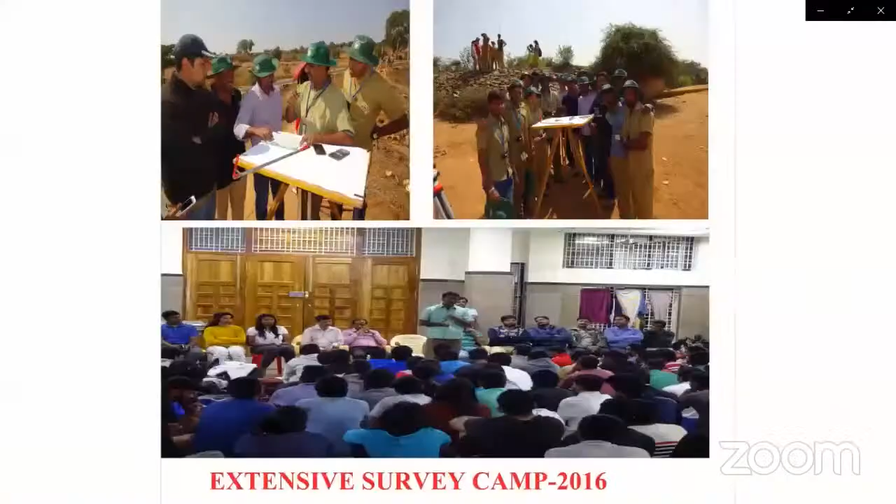Field trips and hands-on learning make concepts more memorable. Our branch, being more related to fieldwork, ensures students get exposure by organizing field visits to various places such as water treatment plants, construction sites, irrigation and dam sites, etc. Also, an extensive survey camp is part of the curriculum for 6th semester students.

Every year, the camp is conducted for a duration of 10 days at Melukote in Pandavapura Taluk of Mandya district, Karnataka. Around 4,000 engineers have graduated from the department since 1979. The alumni of the department are part of national and international projects, and many are leading entrepreneurs. To name a few, our alumni are rendering their service in Indian defense, Indian administration, politics, arts, sports, research, and academics.

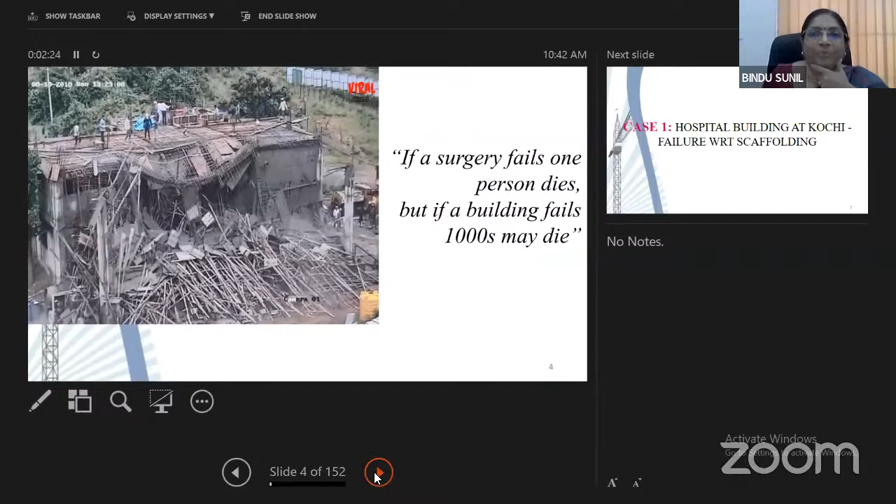I will share a small video showing this. I hope you are able to see the video. Yes, ma'am. Okay, so moving on to the case studies.

Here I am trying to, I have planned to present 5 case studies which I was involved in. Our company was involved in some way or the other. Some projects we were the primary structural consultants, and in some projects we were peer reviewer.

So this is a hospital building, with respect to a scaffolding failure. Here we were the primary structural consultants, and a supervisory role was not given to us. We issued the drawings, and before designing the structure, we had visited the site and understood the topography, and we designed the structure and gave it.

It is a hospital building with 3 basements and 6 floors. The floor heights are as follows: basement 3, the lowest basement, is 4.2 meters, basement 2 is 3.9 meters, basement 1 is 4.2 meters, and ground and the 5 upper floors are all 4.2 meters.

The problem happened when a porch slab, a front porch slab, spanning an area of 10 meters by 50 meters, collapsed while concreting was being done.

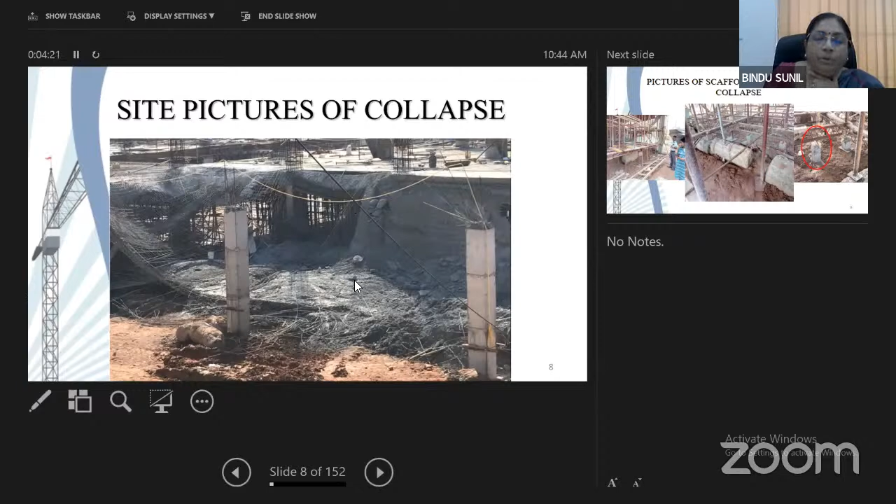So this is the area, this picture shows the area where the collapse happened. This highlighted area is the portion where the collapse happened. This is a side picture of the collapse after it happened. Half the portion of the slab collapsed while concreting was going on.

Later when we visited the site, we could see that the scaffolding system provided, the supporting systems provided, were not at all up to mark, to the point that it is a miracle that only half the portion of the porch slab collapsed.

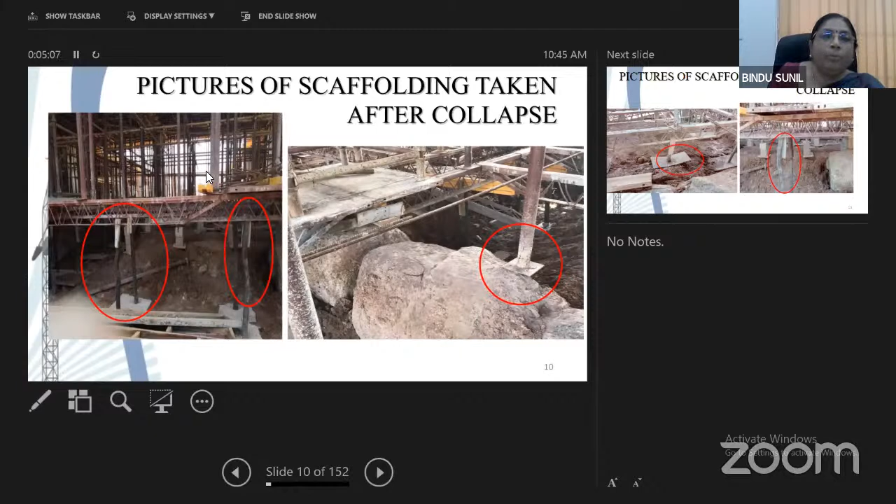So if you can see, this is how the supports were, the props were supported. These are all broken bits of piles, and the supports are not through and through. It is haphazardly supported on a bent wooden piece, and then the acro span is provided. Above that, another vertical member is provided. The proper diagonal or horizontal bracings are not there.

So these are pictures highlighting how the collapse happened. So why did it collapse?

The vertical props and acrospans of the scaffolding system were of poor quality and in bad shape. Supporting jacks were extended to their maximum length, leading to a large slenderness ratio, and there were no proper horizontal or diagonal bracing for lateral stability of the system.

Broken concrete cubes were used for supporting the props. The base of these props were not properly supported. The geometry of the scaffolds or staging was not correct for a smooth load path to transfer the heavy concrete load to the ground. The scaffold supports are placed on ground without proper ground compaction or any larger base to distribute the load without settlement.

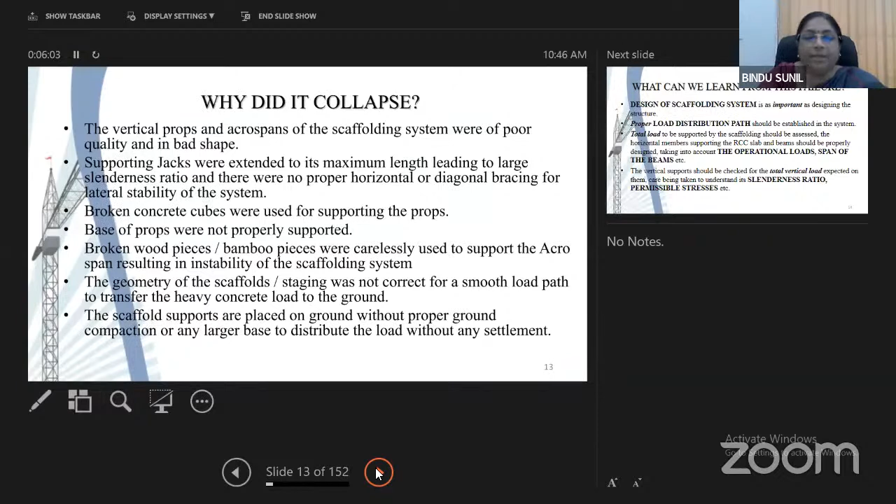So what can we learn from this failure? We have to understand that the scaffolding system is also a structural system supporting loads, and design of the scaffolding system is as important as designing the structure itself.

Like we do for the superstructure, a proper load distribution path has to be maintained and established in the system. The total load to be carried by the scaffolding system should be assessed, and the members supporting it, the horizontal as well as the vertical members, should be properly designed, taking into account the operational loads, the span of the beams, etc.

It has to be borne in mind that the weight of wet concrete has to be taken into account, the live load due to men and machinery, and the pumping impact load on the shuttering due to the pumping of concrete, etc., are to be taken into account.

The vertical support should be checked for the total vertical load expected, with care taken to understand its slenderness ratio, permissible stresses, etc. The height of the staging or scaffolding should be checked, and proper bracings should be provided to prevent buckling and ensuing failure.

Most importantly, the foundation or base support should be properly seated, anchored, or held firmly in position at the base using suitable methods, so that sinking of supports, dislocation of supports, swaying, etc. are prevented.

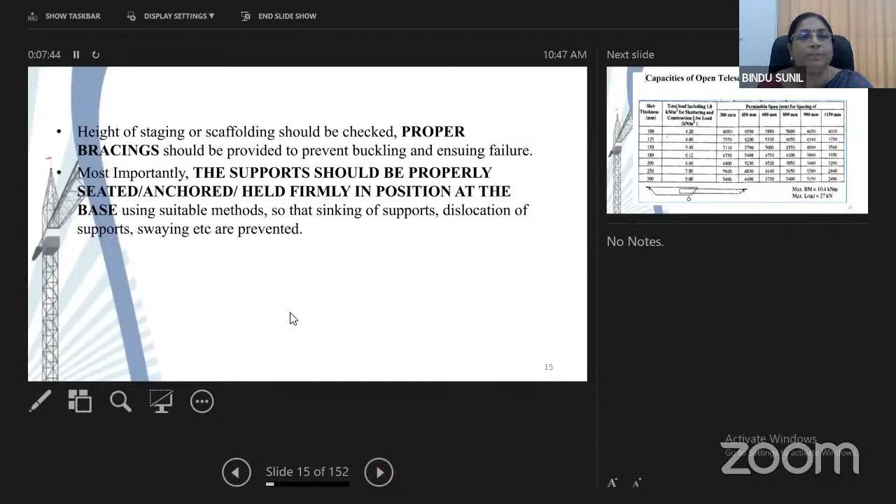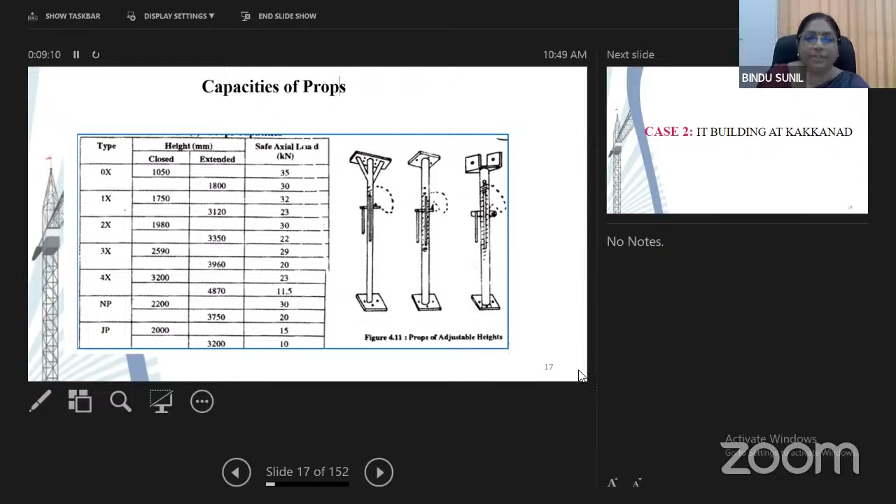So whoever is the contractor will have to prepare a staging detail, and it will have to be vetted by a structural consultant, and the adequacy of the sections provided should be checked. So this was with regard to failure of a scaffolding system.

The second case is with regard to an IT building at Kakkanad, where the concrete strength attained for columns was less than what was required. In this project, we were associated as peer reviewers. So these are the details of the project.

This is an IT building, about 5 lakh square feet area. It has basement plus ground plus 19 floors, and the floor heights are written here. 3.4 is the ground floor height, then 3.15, etc.

So the problem is that in the basement, ground floor and first floor combined, some 19 columns altogether had concrete strengths reduced by 30 to 45% than the required M45.

The building has a basement plus 20 floors. Columns are spaced at approximately 10 meter by 10 meter grids. The concrete mix specified for columns in basement, ground floor, and first floor was M45. Cube strength results for 19 columns in ground floor and first floor showed strengths way below the required M45.

Since the cube strengths were less than what was required, additional tests were done to confirm the in-situ strength of the concrete. For that, rebound hammer test and core test were conducted.

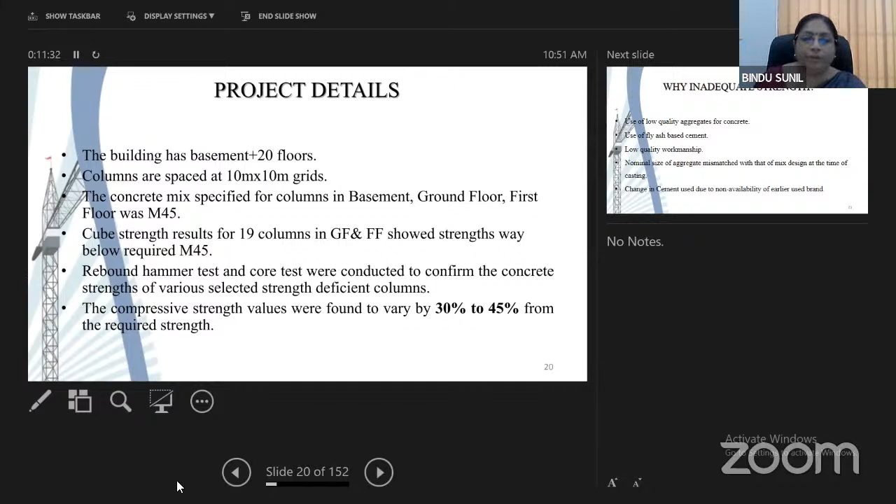So why did this reduction in strength happen? There are many reasons for concrete attaining lower strength than expected with respect to the mix design. One is use of low quality aggregates for concrete. We have a certain specific size and shape for the coarse aggregates for concrete. So if long and flaky aggregates are used, it will break and the strength of the concrete will be reduced.

Then use of fly ash based cement. Fly ash based cement can of course be used, but it has to be judiciously done. So here there was some problem with the fly ash content, and that also contributed towards the low strength. Then low quality workmanship, which comes in the compaction of concrete, curing of concrete, etc. If all these things are not done properly, obviously the concrete strength attainment will be reduced.

The nominal size of aggregate used at site mismatched with that used in the mix design at the time of casting. That means the mix design is done with available materials and a trial batch is prepared and the concrete strength is ascertained. But later on, when different types of aggregates or components come, trial mixes for all these variations in the components are not done, and it may vary from the actual mix design and the site mix produced.

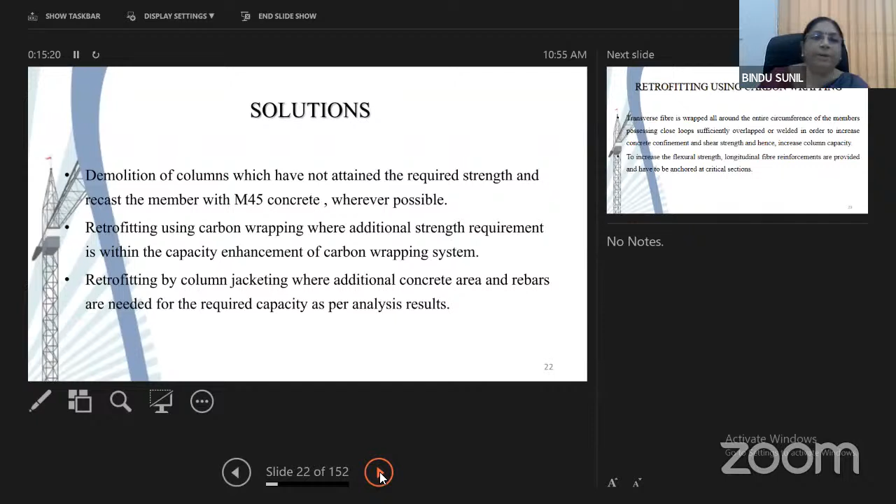For some columns, the upper floor shuttering was already completed, so demolition would be more difficult, because steel reinforcement cages were also placed for the next floor beams. So we proposed carbon wrapping for such columns where the reduction in strength was less than 25%. For columns with reduction in strength more than 25%, up to 45%, such columns were asked to be retrofitted by column jacketing, where additional concrete area and rebars are needed for the required capacity as per the analysis results.

Retrofitting using carbon wrapping means carbon fiber reinforced polymers, which are readily available, and like rebar, they have strength specifications, so as per our strength requirement we can use them. They can be tightly wrapped around the column, and the increase in strength is caused due to confinement. If a beam is of low strength and we use carbon wrapping, then to increase flexural strength, longitudinal fiber reinforcements can also be provided. But here it was with respect to a column, and these carbon fibers were asked to be sufficiently overlapped to increase the confinement and increase the column load carrying capacity.

So these are some pictures showing how carbon wrapping is done. By column jacketing, this is just a sample detailing. The existing column will be this. We will have to increase the width and length of the column, and a minimum of 75 mm will have to be provided; more will be needed if additional strength required is more. So here we propose a 75 mm increment on all four sides, meaning 15 centimeters altogether added to the width and length of the column, and additional rebars were provided.

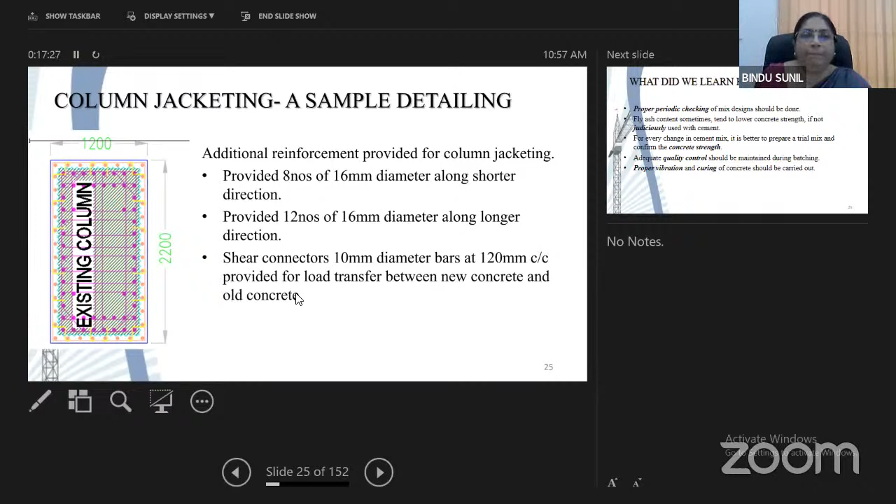So this was how it was done. What we learned from this failure is that proper periodic checking of mix design should be done. Once a mix design is done for M45, say, it cannot be used for the whole building.

For each stage, the cement brand or where the cement is acquired also has an impact on the strength. So all the components like cement, sand, coarse aggregate, and the workability agents all play a part in imparting the concrete strength.

When changes happen in the components, the concrete mix design has to be done again. A trial mix has to be prepared to ensure the concrete strength, and then that mix has to be used. Fly ash content sometimes tends to lower concrete strength if not judiciously used with cement, so that also has to be taken into account while preparing the mix design. For every change in cement mix, it is better to prepare a trial mix and confirm the concrete strength.

Adequate quality control should be maintained during batching. Proper vibration and curing of concrete should be carried out. Everyone knows these basic things, but they may not be judiciously and correctly applied at site. That is the problem. If all these things are done correctly at site, such failures or mistakes will not happen.

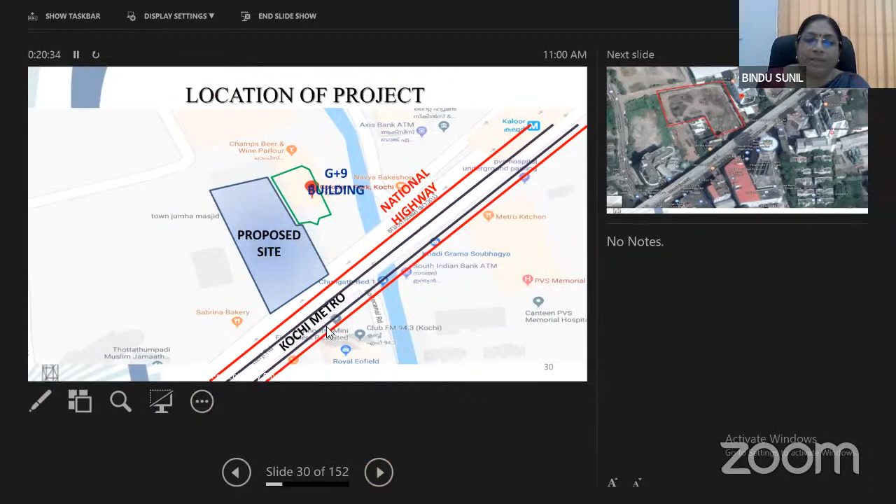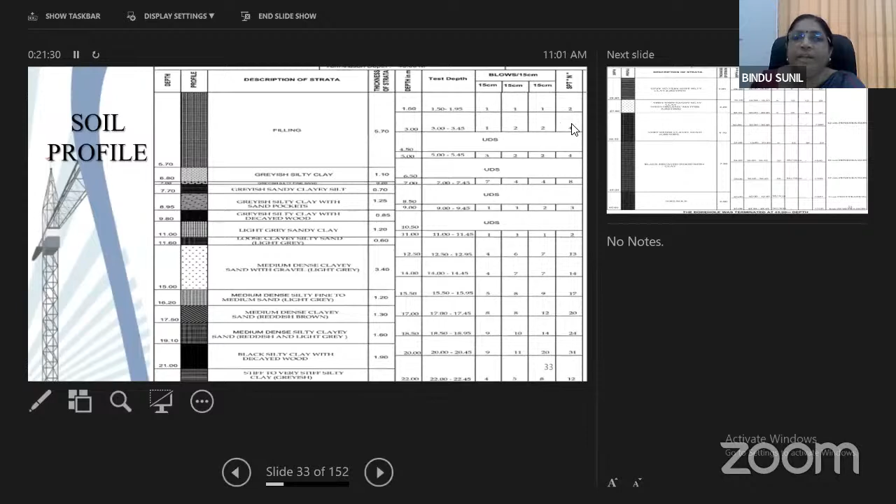So the soil profile, as can be seen, up to 5.7 meters, it is filling, with N values as low as 2, 4, 3, etc. Up to about 12 meters, the soil is very weak and compressible with N values as low as 2, 3, etc.

In this borehole, soft rock was met with at 45 meters depth. This borehole was terminated at 45 meter depth, but we have 5 boreholes and some were taken beyond this soft rock also. So the foundation system provided was DMC piles extending to a depth of 47 meters, terminating in dense sand or hard rock. Wherever this hard rock was further down, it was seated into dense sand with N value greater than 100, with a minimum penetration of 2 meters into the dense sand using M35 concrete.

For the shore piles, the depth of excavation is 10 meters. So 30 meter deep, 90 centimeter diameter shore piles were provided. There were soldier piles provided inside the floor to support a strutting system provided to act as props for the shore piles.

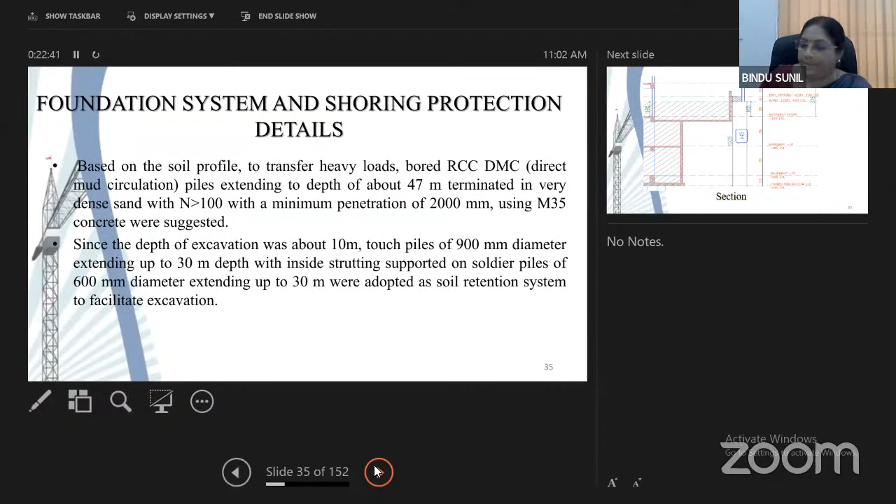So this is a section showing the excavation needed. This is the road level. From here, 9.5 meters is the excavation needed. This is a basic shore pile retention system provided. This is the boundary, the shore piles. We can see the shore piles here all along the periphery of the floor. Then this is the prop system, the strutting system provided.

This is the system provided. The shore piles provided are 90 centimeter diameter piles with a 30 meter depth, and the soldier piles are 60 centimeter diameter piles with a 30 meter depth.

In the construction phase, around 337 piles of 90 centimeter diameter were driven as touch piles, and 28 soldier piles were driven.

The touch pile system was designed as a propped cantilever to resist the lateral loads, as explained by the original structural consultant. Touch piles were done at the boundary by excavating a trench of 90 centimeter width and 1.5 meter depth in line and level. Alternate piles were done initially and then the in-between piles were done. So this was how the touch piles were done.

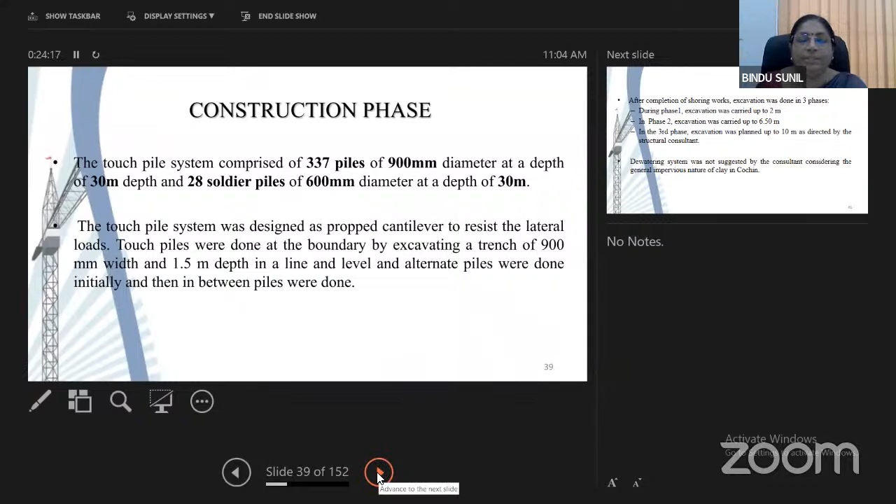After completion of shoring works, excavation was done in 3 phases. In phase 1, excavation was carried out up to 2 meters. Then from 2 meter to 6.5 meter. In the last phase, excavation was planned up to 10 meters as directed by the structural consultant.

Expecting clayey soil here, no dewatering system was suggested by the consultant.

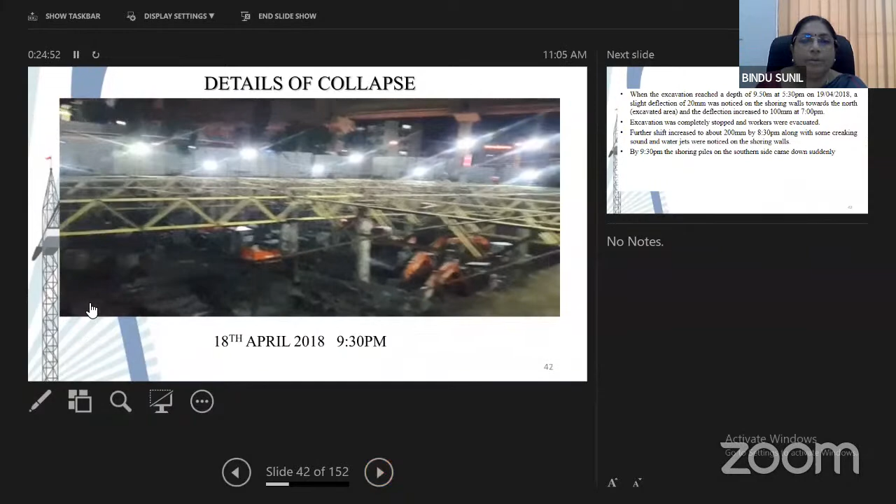This is what happened when the excavation reached a depth of 9.5 meters. A slight deflection of 20 mm was noticed, and it increased to 100 mm at 7 p.m. Excavation was stopped and workers were evacuated, but on the other side, where the excavation hadn't reached that much depth, some workers were still there.

By 9:30 p.m., the shoring piles on the southern side came down suddenly. That is what we saw just now in the video. This video was taken by some people in the opposite side hotel, who were interested in viewing that, and this video was taken by them.

So this is the picture after the failure happened. This is the line along which the piles were provided, where the Kochi Metro Rail is there. This is the adjacent building. You can see that the soil has sunken here and part of the foundation is being exposed. The ground has cracks here.

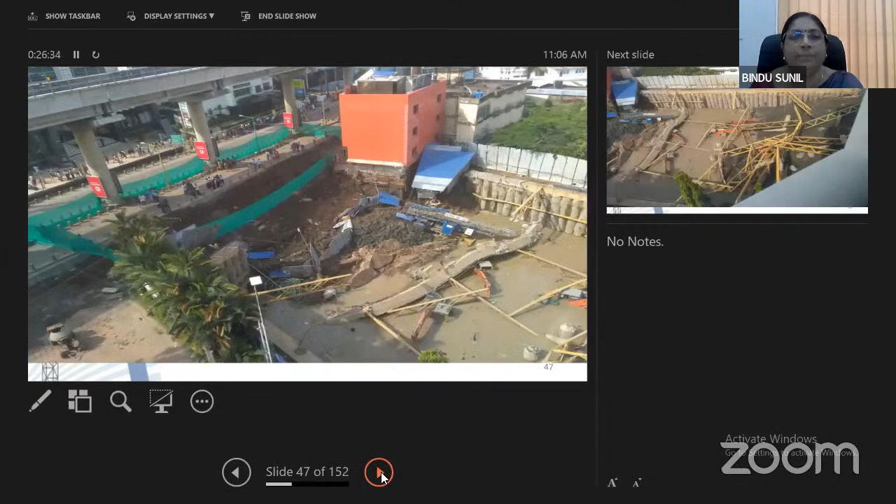On visiting the site, these observations were made. Due to the collapse of the touch pile system, the nearby road and earth had sunken by approximately 3 meters on the south side of the excavated area. Due to lateral shifting of the piles, the nearby earth was sunken on the southward side of the excavated area. The building near the southwest corner had a slight tilt towards the east side, cracks were noted in the building, and part of the foundation was exposed. This is indicative of progressive failure and may lead to sudden collapse of the building.

But that building, luckily, was meant to be demolished, with new construction planned there, so there was no problem with that. But if it had collapsed and fallen over, some casualties may have happened. Luckily, nothing like that happened.

Cracks were noted at ground level on all the other 3 sides of the excavated area. The roads paved with interlocking tiles had differential settlements, and the tiles were dislocated. Public utilities such as road traffic, electricity, and water supply were adversely affected by the collapse. It also resulted in a temporary halt of the Kochi Metro operations, since the structure was located near a metro station.

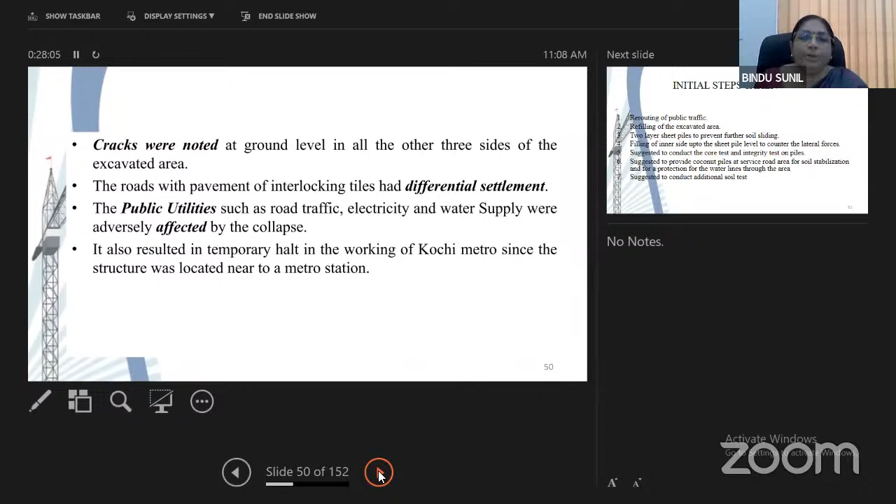Since such a big failure happened very near to the main road, the district collector intervened, and a technical committee was formed to address the issue, to understand why it happened, and to provide remedial measures.

Initial steps taken by the committee were to reroute public traffic, then the excavated area was asked to be refilled to reduce the retention height. Sheet piles were asked to be provided in 2 layers to prevent further soil sliding. Inside of the sheet pile, filling was to be done again to counter the lateral forces. Then core tests and integrity tests were asked to be done on the piles for forensic study.

Coconut piles were asked to be driven to stabilize the service road area for soil stabilization and for protection of water lines, since Kerala Water Authority's lines were running along that area. An additional soil test was asked to be done to understand the soil parameters and to check the design of the touch pile system.

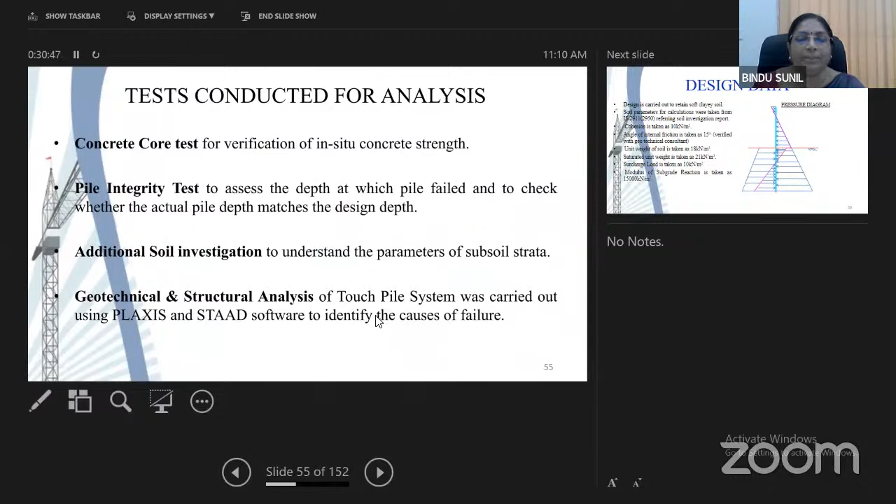So this is showing how it is done. This is the pressure diagram that comes on a shore pile when it is excavated. After this will be the ground level. When this much soil is excavated, this will be the active soil pressure, and this will be the passive soil pressure. So these are the different parameters we had taken.

Design is carried out to retain soft clayey soil. Soil parameters for calculations were taken from IS 2911, referring the soil investigation report. The cohesion coefficient is taken as 10 kilonewton per meter square, and angle of internal friction of the soil was taken as 15 degrees. And we cross-checked with the geotechnical consultant. With his approval, this value was taken.

Unit weight of soil is taken as 18 kilonewton per meter cube, and the saturated unit weight is taken as 21 kilonewton per meter cube. Surcharge load of vehicular traffic is taken as 10 kilonewton per meter square, and the modulus of subgrade reaction is taken as 15,000 kilonewton per meter cube.

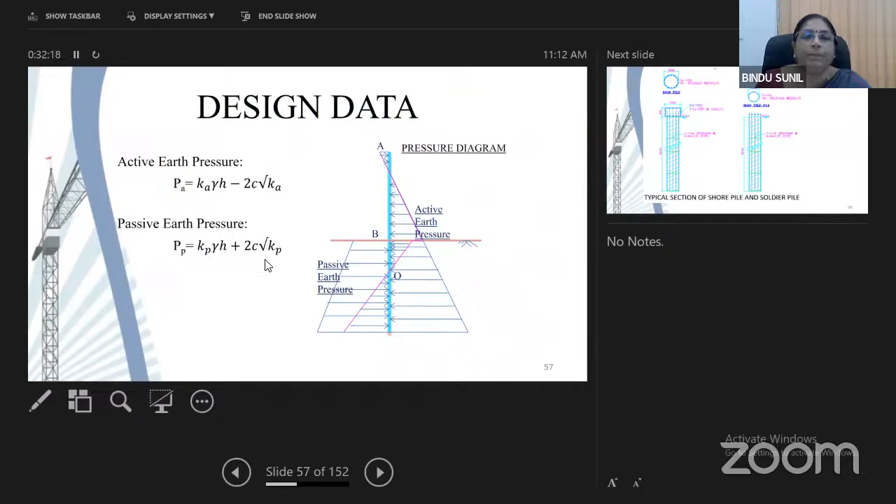And this is the active earth pressure equation. PA is equal to Ka gamma H minus 2C root of Ka, where Ka is 1 minus sin phi by 1 plus sin phi. And passive earth pressure PP is Kp gamma H plus 2C root of Kp, where Kp is 1 plus sin phi by 1 minus sin phi.

So these are the cross sections of a shore pile and soldier pile. Shore pile is 90 dia, and the reinforcement provided is 14 numbers 20 dia bars. For soldier pile, the diameter provided is 60 centimeters, and the reinforcement provided is 7 numbers 16 dia bars.

With the diameter and the reinforcement known and the concrete mix used, we can understand what was the moment of resistance, what is the moment carrying capacity of the shore pile provided. So for 90 dia pile, mix M35 and 14 numbers 20 dia bars, the moment of resistance worked out to be in the range of 800 to 815 kilonewton meter.

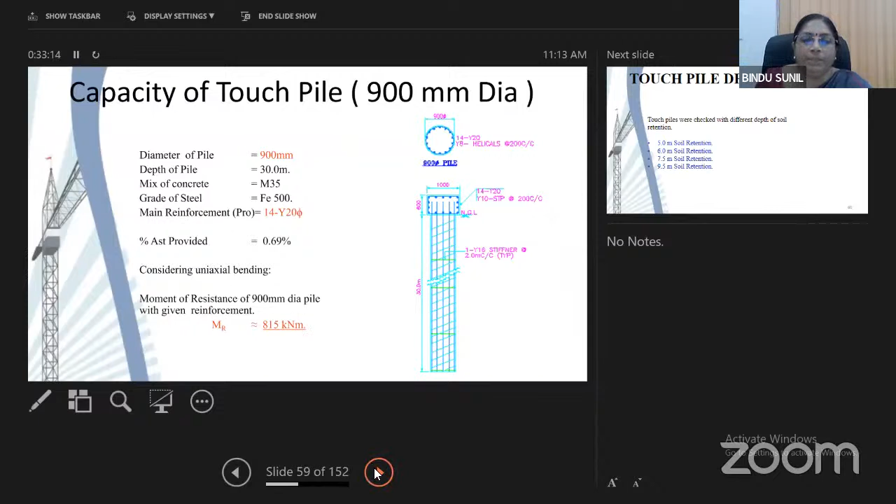Now our endeavor was to understand to what depth of excavation these touch piles will be safe. Only in the front side the touch piles had totally collapsed. Other three sides the touch piles were still standing, and we had now stabilized that area by refilling. So up to what depth the touch piles will be safe without any other propping or strutting system, we tried to find out.

So we modeled and found out for 5 meter depth of soil retention, 6 meter depth of retention, 7.5 meter depth of soil retention, 9.5 meter final depth of soil retention.

So this is the pressure diagram prepared for 5 meter soil retention. For the 5 meter depth of soil retention, point of rotation, that is, the distance at which the pile might rotate - that can be found from equations, and that was found to be about 0.9 meters.

These are the different parameters we have taken, and this is the output from STAAD model. For 5 meter cantilevered pile, for the retention load of 5 meter, the maximum deflection noted was 43 mm, that is 4.4 centimeters, and the maximum moment that was coming is around 350 kilonewton meter.

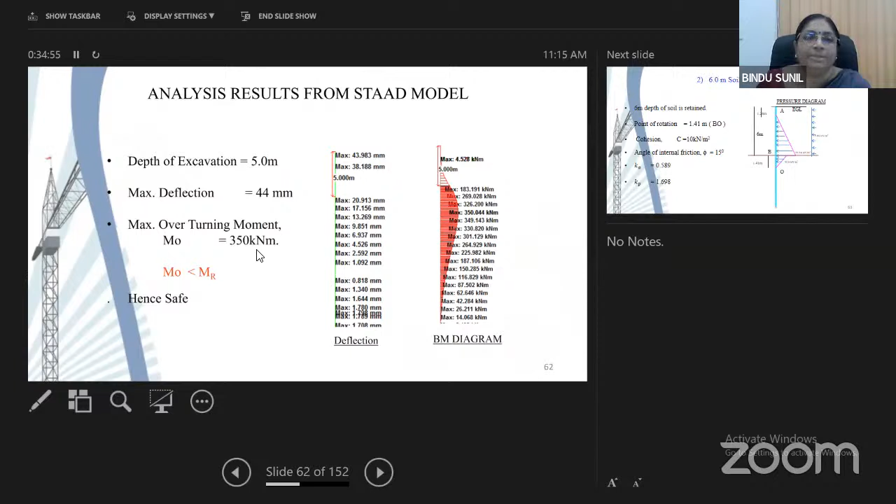The moment of resistance we had assessed was in the range of 815. So this is less than the moment resisting capacity of the pile, and so it will be safe for 5 meter retention. Then for 6 meter retention, the same procedure was done.

And here the moment increased up to 633 kilonewton meter, and the deflection increased to 90 millimeters. The deflection is slightly higher. However, since this is the temporary structure, this can be taken as okay. And the moment also was within the moment resisting capacity of the pile, taking a factor of safety of 1.3.

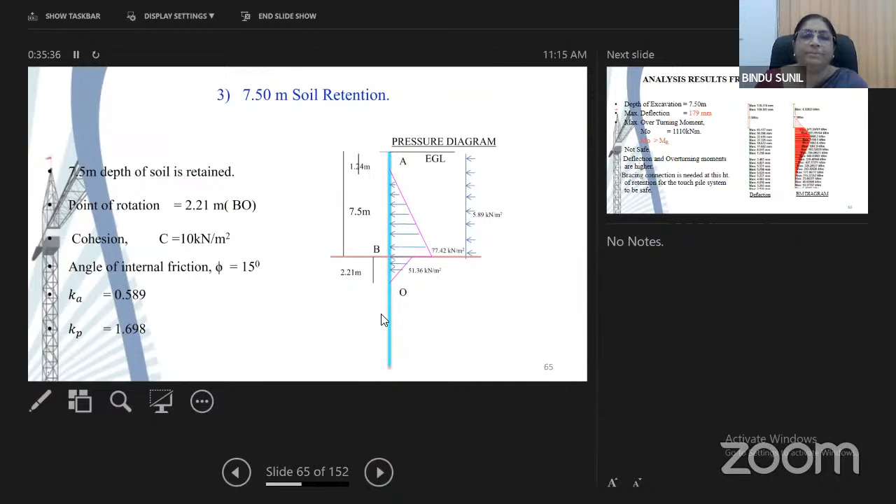For 7.5 meter soil retention, again the point of rotation and the pressure diagrams were calculated. When we did the analysis in STAAD model, it was found that the deflection increased to 179 mm, and the maximum moment was seen to be 1110. This is obviously unsafe, because even without factor of safety, the capacity of this pile is 800 or 815 kilonewton meter.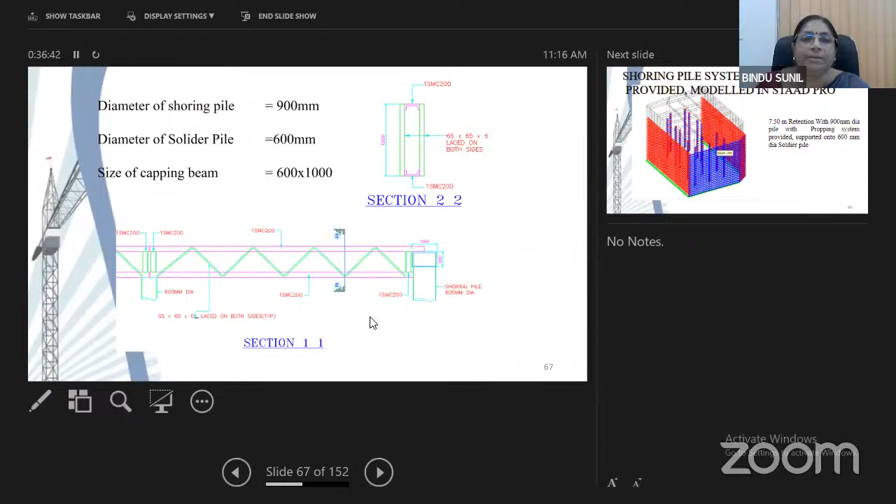So we modeled this. We modeled the entire touch pile system with the bracings in the three-dimensional model we created, and the loads were given accordingly. The supports were provided at the bottom with lateral confinement.

So this is the analysis results of the strut system provided, where utility ratio of truss element was checked. That means the actual stress in the element divided by the permissible stress should be less than 1, but we were getting values as high as 3.5, 3.7, etc.

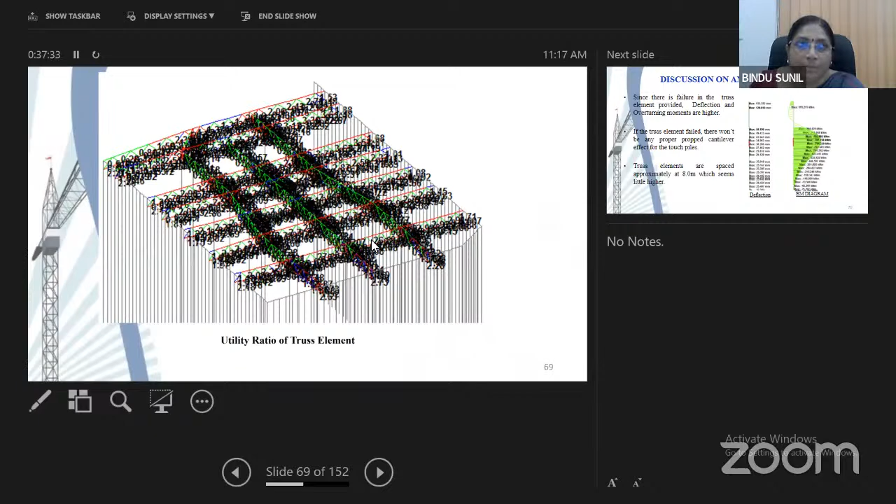So this system was totally not safe to take up the loads, the huge lateral loads that were expected to come over there.

So if we discuss the analysis results, it can be seen that there is failure in the truss elements provided. Deflection and overturning moments are higher. Here the deflection is 132 mm and the moments are coming at 800 kilonewton meter. So if the truss element failed, then we cannot say that there is a propping action for the piles. There will be no propping action and the deflection will be still higher.

When we check the reinforcement required from the model for the touch pile system, the reinforcement required was 60 centimeters square, whereas the AST provided was only 44 centimeters square. For the soldier piles, the reinforcement required was in the range of 40 centimeters square, whereas the provided reinforcement was only 14 centimeters square. So the reinforcement provided for both the touch pile and soldier piles is less than what is required.

However, if the propping system is more sturdy and safe and more number of propping systems are provided, the buckling of these piles will be less and the reinforcement required can be brought down. So what we suggested was that with a proper propping system, for 7.5 meter excavation, the driven touch piles can be made safe.

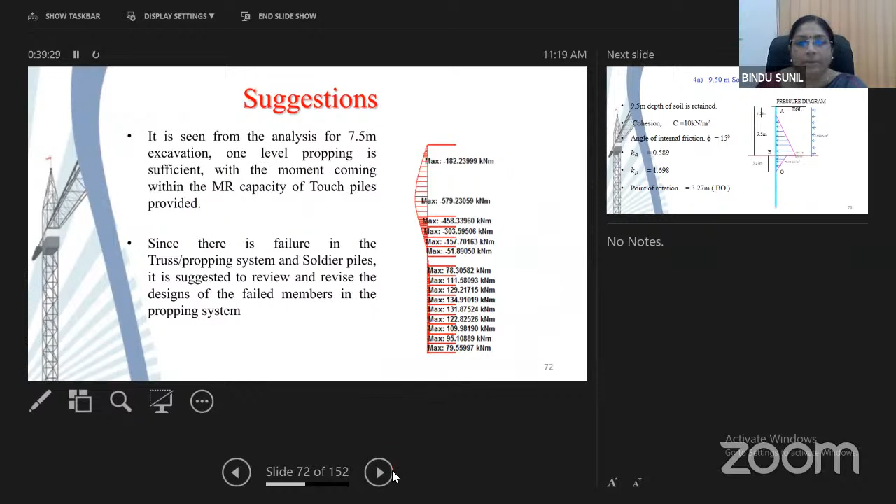For 9.5 meter soil retention also, we did the same exercise. The point of rotation was found. Here it was found to be about 3.2 meters below the excavated level.

And when analyzed as a single member in the model, we can see that the deflection comes to around 400 mm and the maximum bending moment comes to about 2090 kilonewton meter. So obviously this is not safe.

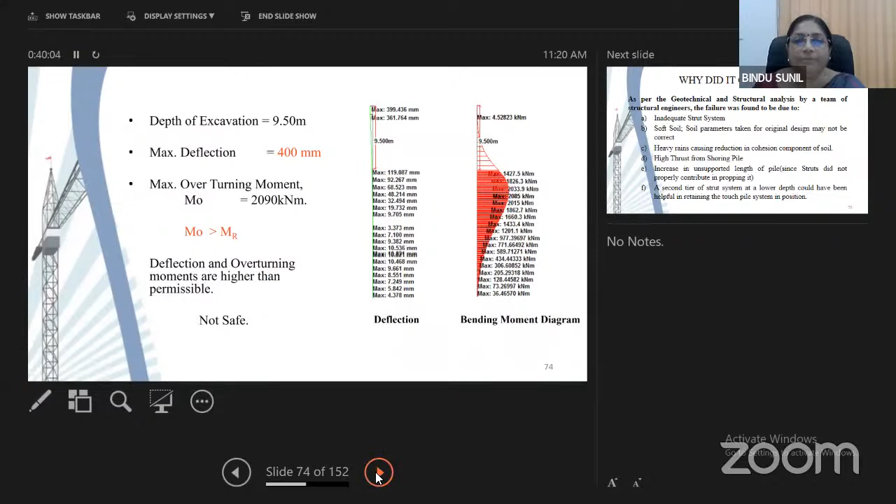So if we look at the reason why the collapse happened, like I said, there was a technical committee formed, and the Association of Structural and Geotechnical Consultants in Kochi were part of this technical committee, and we all deliberated over it, and these were the reasons.

Inadequate strut system. Obviously, if the strut system was proper, the propping action expected on the touch pile would have acted and it would have been safe. This was the most important neglect that happened in the design of the strut system.

Then, the topsoil is too soft. Soil parameters taken for the original design may not have been correct, was what we felt. Also, in the previous days before the collapse happened, heavy rains were there, and that might have caused reduction in the cohesion component of soil, thereby increasing the lateral thrust on the shore piles.

Since the props did not act properly, there was increase in the unsupported length of pile, and of course, this means that cantilever action ensued and the collapse happened.

If this 9.5 meter total excavation was needed, we felt that if a second tier of strut system was provided at a lower depth, the same diameter and reinforcement for the touch piles would have been safe.

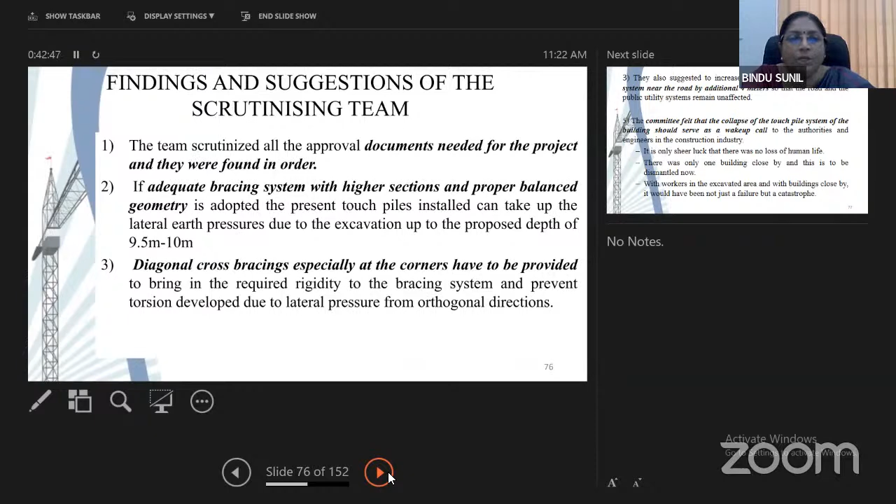If an adequate bracing system with higher sections and proper balanced geometry was adopted, the present touch piles installed could take up the lateral earth pressures due to excavation up to the proposed depth of 9.5 to 10 meters. Since it is a three-dimensional area with corners, diagonal cross bracings should have been provided to bring the required rigidity to the bracing system and prevent torsion developing due to lateral pressure from orthogonal directions.

They also suggested increasing the setback of the touch pile system near the road by an additional 4 meters. Near the road, the collapse had already happened, so driving touch piles again there is not practical. So the basement was asked to be reduced in extent by 4 meters from the road.

The committee felt that the collapse of the touch pile system should serve as a wake-up call to authorities and engineers in the construction industry. It was only by sheer luck that there was no loss of human life. There was only one building close by, and this was to be dismantled, so even if some cracks developed in that building, it was of no consequence. With workers in the excavated area and buildings close by, it could have been not just a failure, but a catastrophe.

What did we learn from this failure? We learned the importance of proper site investigation. This means understanding what type of soil investigation and lab results are needed, understood in the initial stage itself, and the geotechnical consultant should be briefed and whatever data needed should be obtained from him. The importance of proper site investigations cannot be emphasized enough.

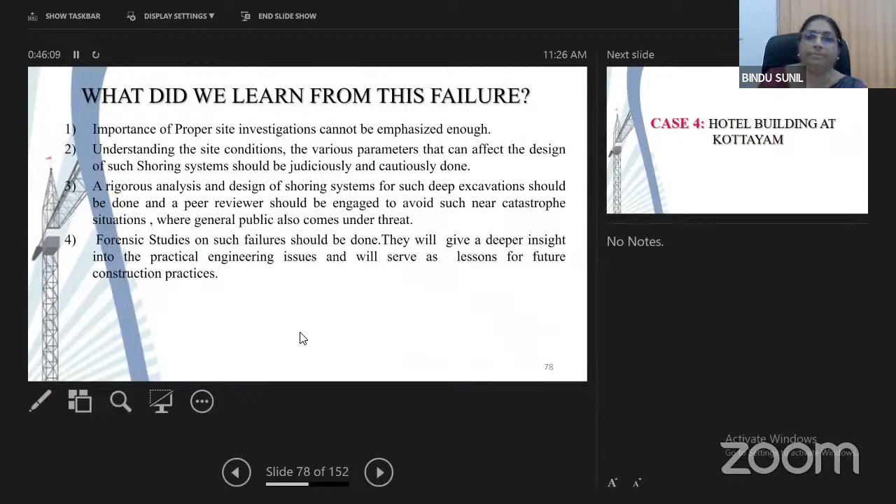Now we come to the fourth case study, a hotel building at Kottayam. We were involved in the first stage of construction, and later when some mishap happened in the building, we were contacted. In between they contacted another consultant too, and some constructions were done, but later when a failure happened and they couldn't control it, we were asked to intervene and give a solution.

This is a small building with G+2 floors, only 3 floors, a hotel building, and the total height of the building is only 9.45 meters, with floor heights as shown. The problem was that after 2 to 3 years of construction, cracks were observed in the building, meaning cracks were seen in the block works. Being a hotel, that cannot be permitted.

Investigations started as to why these cracks were formed. We couldn't find any cracks in the structural elements, and after continuous observations and taking readings, it was found that the cracks were due to differential settlement of foundation resulting from mass movement of soil underneath. The building, along with the piles, seemed to have been pushed, and this slanting, out-of-plumb action of the building caused the cracks in the masonry walls.

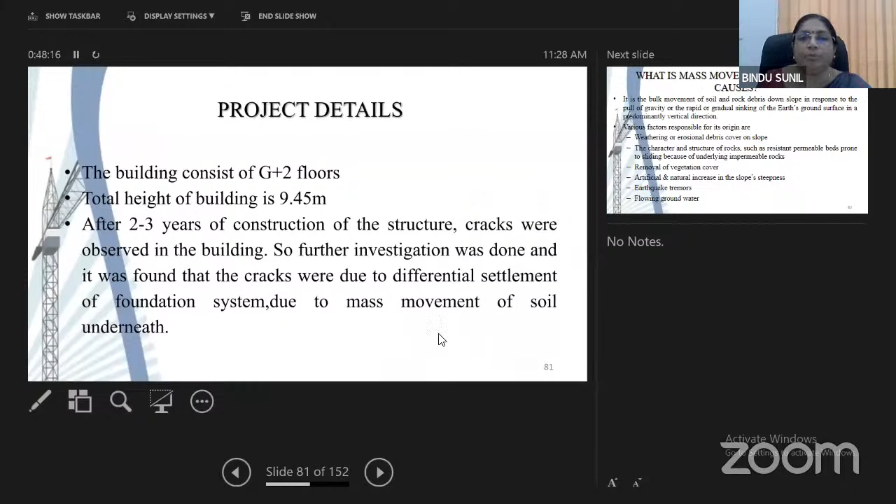So what is mass movement of soil, and how does it happen? This mass movement means bulk movement of soil and rock debris downslope in response to the pull of gravity, or the rapid or gradual sinking of the Earth's ground surface in a predominantly vertical direction.

Various factors can be attributed to such mass movement of soil. Weathering or erosional debris cover on slope: if erosional debris are there, this may cause mass movement of soil. Then character and structure of rocks, such as resistant permeable beds prone to sliding because of underlying impermeable rocks. So on top of impermeable rocks, if permeable beds are there, they may tend to erode or move as a body. Then removal of vegetation cover, cutting of trees, etc., can cause this.

Then artificial or natural increase in the slope steepness can occur. Then earthquakes, tremors, flowing groundwater, etc., can also be attributed to such mass movement of soil.

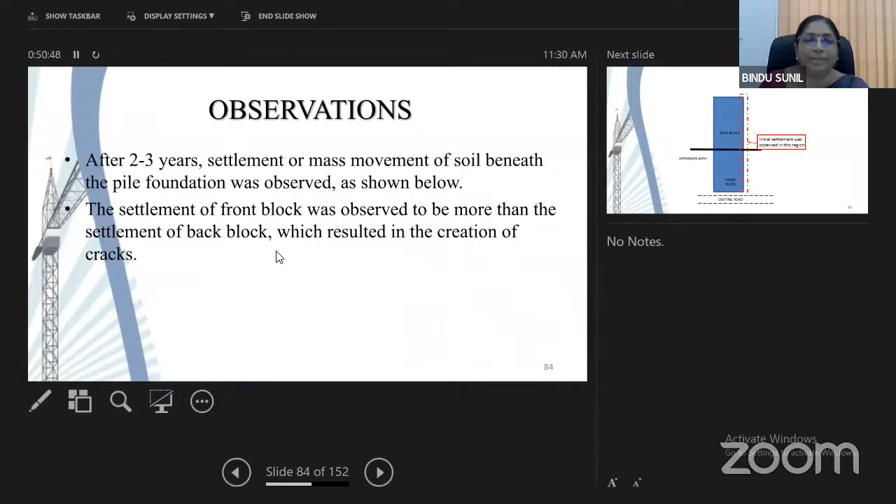So this is the road, this is the front block. Then there was an expansion joint provided. The length of the building was more than 110 meters or so, so we had provided an expansion joint. So this is the back block. Here, in this highlighted area, the settlement was more compared to this area.

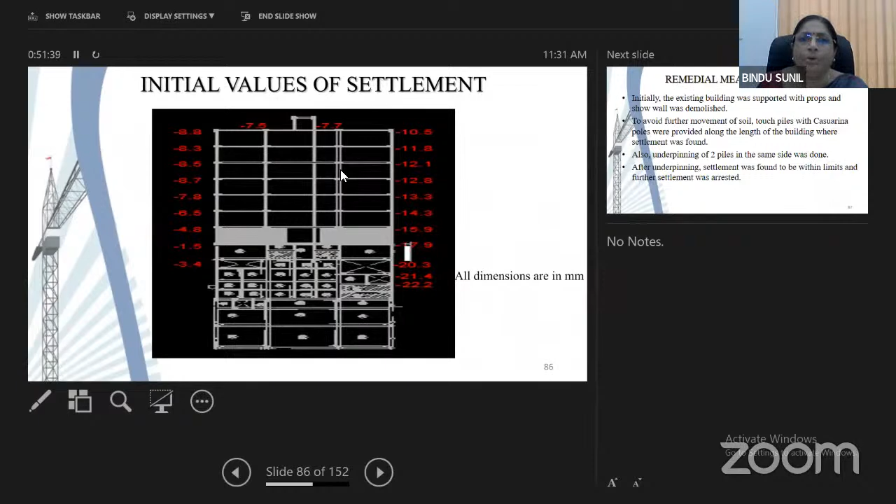So if we look at the settlement values here, you can see this is 8.7, 8.5, etc. But here it is 10.5, 11.8, 12.1, 12.8, 13.3, 14.3, 15. So there is a slope in this direction and in this direction too. So the buildings seem to tilt towards the expansion joint.

So in the initial stage, what we did was the existing building was supported with props, and show walls constructed were demolished to reduce the load on the foundation system. And then, to avoid further movement of soil, Casuarina poles were driven as touching piles, touching each other along the periphery of the building.

Then two piles, mostly affected in the area where this maximum sinking had happened, were underpinned using additional two piles. After this underpinning, settlement was found to be within limits and further settlement was arrested. So the building was operational and serviceable.

So this is where we did the underpinning of two piles. Here there is a column, there was a pile. There is a column, there was a pile. So they two were connected, and two additional piles were driven and a cap in this shape was provided to underpin the structure.

However, after 4 or 5 years, they made some changes in the building with another consultant. They made some interior design changes, and along the expansion joint, slabs above the ground floor were demolished and some changes happened internally in the building. So when the status quo was broken, the building again started to move and differential settlement increased and cracks started to develop. The second time, the cracks extended to the columns also in the expansion joint area.

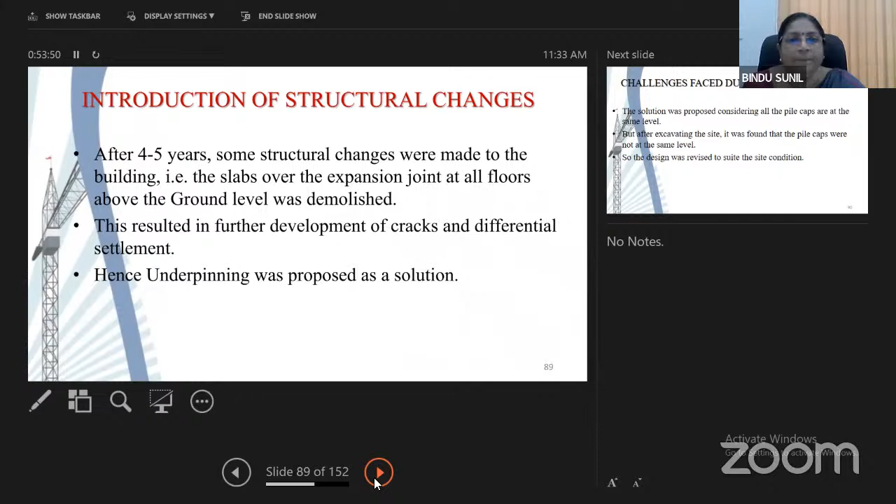So when they saw cracks developing in the columns also, they again came to us. We studied the situation and underpinning was proposed as a solution. We have a retrofitting section division here, and the retrofitting was done by ourselves. So we prepared the drawings for retrofitting, and while executing, the challenges faced were like this.

The solution was prepared considering that all the pile caps are at the same level, because as per our drawing they were to be at the same level. But at site, due to some service lines crossing, etc., they had done the pile caps at different levels. So the underpinning was not possible at one level. After excavating the site, it was found that the pile caps were not at the same level, so the design was modified to suit the site conditions.

This is the building, the expansion joint area. This is where, inside the building also, we proposed underpinning. This is the area, here and here. Here we have already done this.

In addition to that, this much underpinning was proposed. This is the basic drawing provided for underpinning. These are the existing columns and piles, and these are the additional piles provided. This is the shape of the pile cap we proposed for underpinning. This is the existing pile and pile cap, and this is the underpinning proposed.

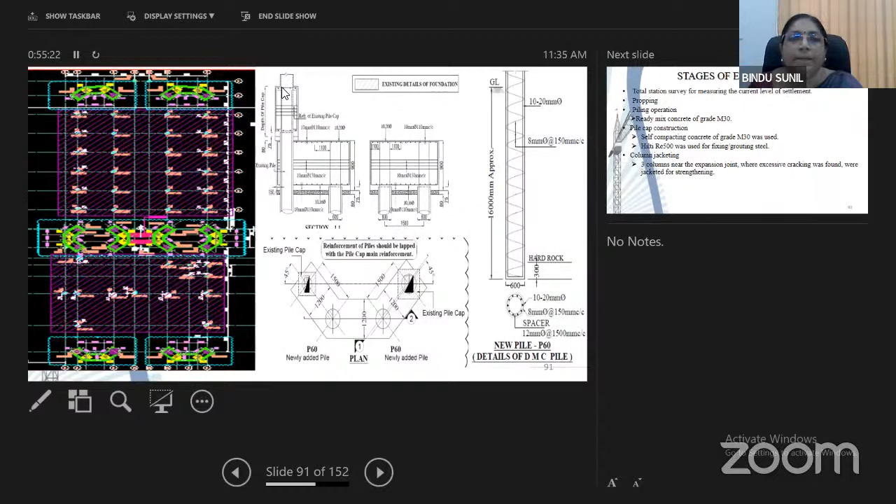Stages of execution: total station survey for measuring the current level of settlement was done, then propping of the building was done, then piling operation was done since inside the building also we had to do the piling, then ready mix concrete of M30 grade was used.

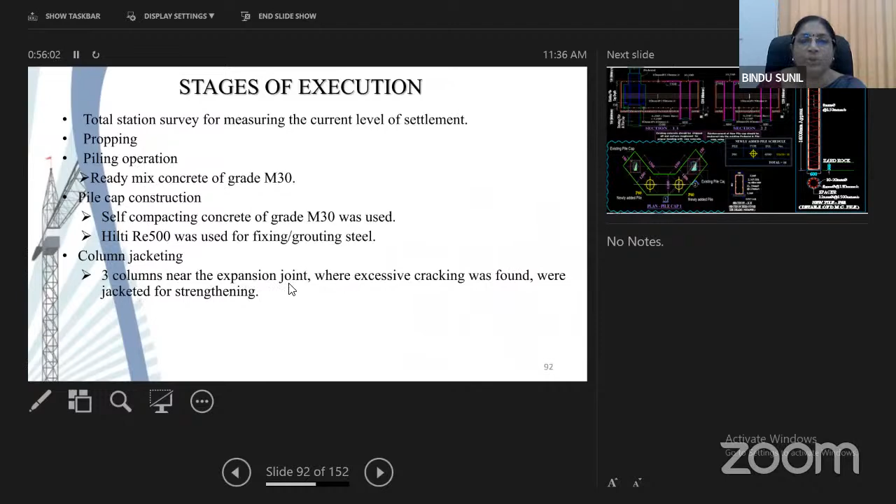Pile cap construction with self-compacting concrete, and Hilti Re500 for anchoring reinforcement into the existing pile caps were used. Then column jacketing was done for 3 columns near the expansion joint where excessive cracking was found.

After the retrofitting works were completed, we monitored the settlements for 1 year. These are the different values we have checked, the benchmarks established, and the readings of settlements. It was seen that the levels were stationary and there was no further settlement after the retrofitting works were completed.

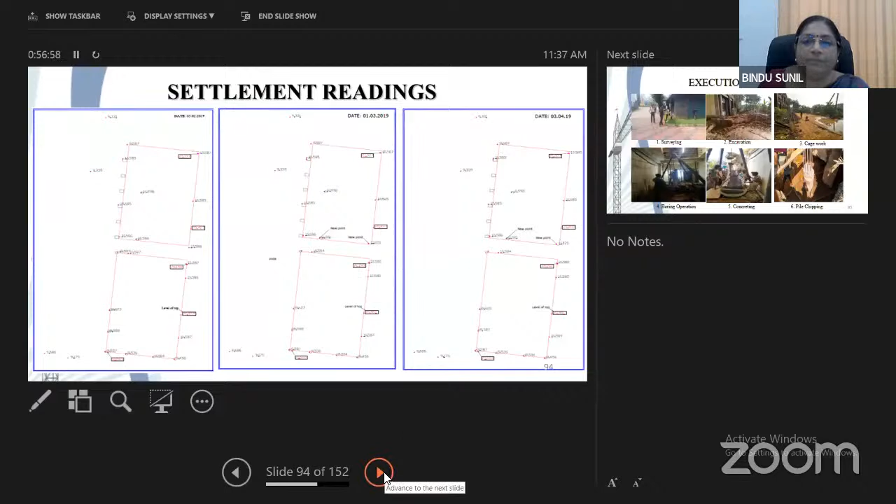Then excavation, the existing pile caps are excavated. Then PCC for pile cap is being done. This is the shape of the pile cap, how it is shuttered up, and concreting using self-compacting concrete. Then tie beams are established.

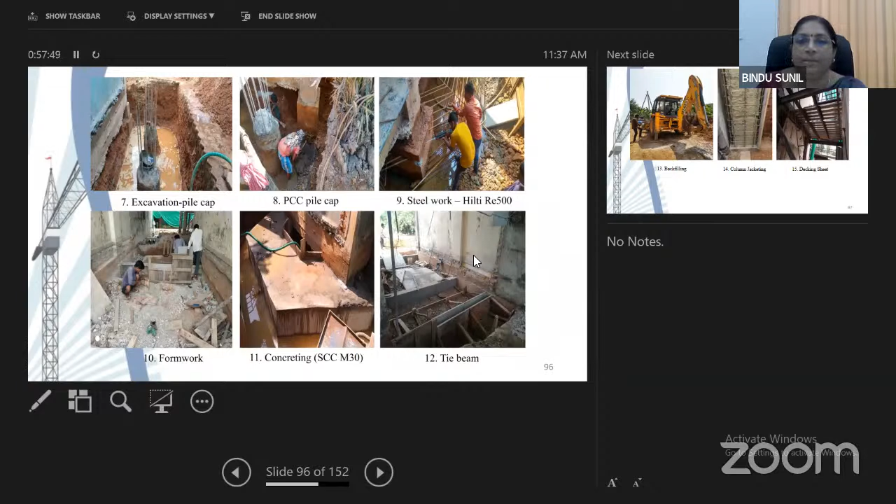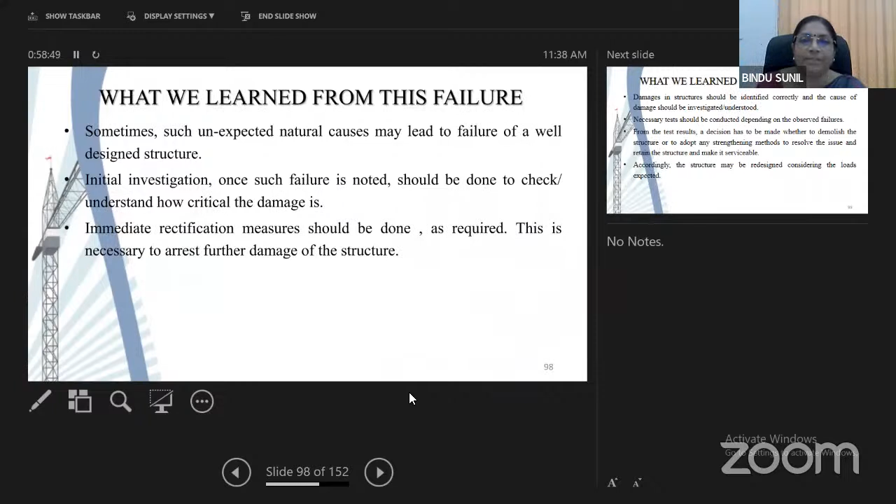What we learned from this was: it was a small building, and DMC piles anchored into hard rocks were provided as the foundation system, so such unequal settlement was not expected, even with piles anchored into hard rocks. We understood that sometimes unexpected natural causes may lead to failure of a well-designed structure. Once such failure is noted, initial investigation should be done to check and understand how critical the damage is, and immediate rectification measures should be done as required.

This is necessary to arrest further damage to the structure. Damages in structures should be identified correctly, and the cause of damage investigated and understood. Necessary tests should be done depending on the observed failure, and from the results, a decision has to be made whether to demolish the structure or adopt strengthening methods to retain it and make it serviceable. Accordingly, the structure may be redesigned considering the expected loads.

The next case study I am going to present is one tower building, a church tower at Trichur. There was no failure as such that happened. The construction of this church tower started in 1929 and completed around 1940. The envisaged height of the tower was to be 70 meters, but maybe due to lack of funds, or fear of raising it to that height, the tower was topped at a lower height. Later in 2000, we were asked to raise the tower to the original intended height of 70 meters.

We had no documents or design drawings of the building, and that was the challenge faced by us. I would like to share our experience in doing this with you here. This is 'Challenges in the Addition and Alteration of Monumental Structures', a case study of Bible Tower, or Puthan Palli as it is known here at Trichur.

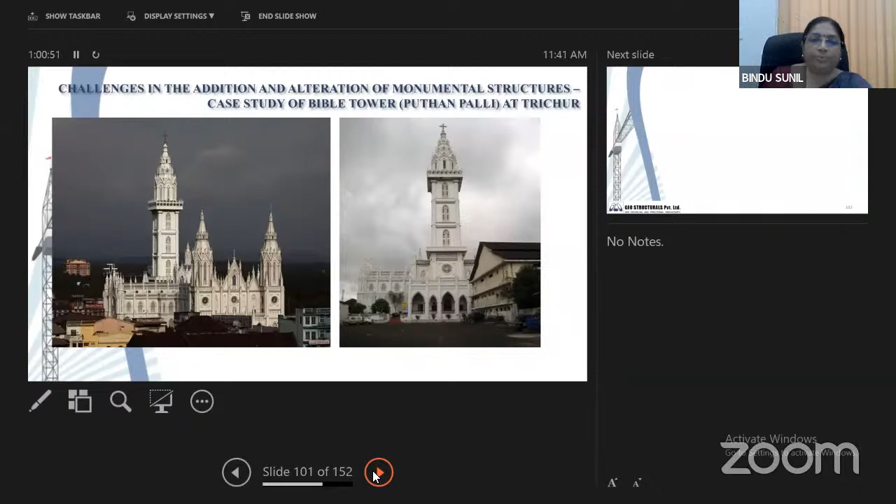The shrine was established as a parish in 1978. In 1992 April, the then Pope John Paul II elevated this church to the status of a basilica. The foundation stone for the present big church was laid in 1929 by Bishop Mar Francis Vazhappilly, and it was completed in around 1940. The salient features of the church include a beautiful twin tower in the front and a taller single tower at the back.

In the year 2000, the project engineer there, late engineer James Alapatt, entrusted the structural design part of raising the tower from the constructed height of 16.5 meters to its earlier intended height of 70 meters to Geostructurals.

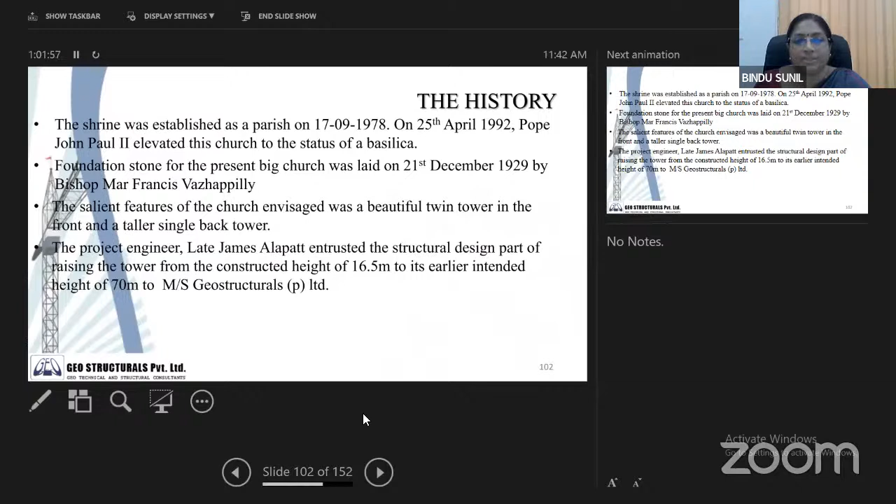So this is the tower as envisaged by the original architect. This was the height he intended way back in 1929 - about 70 meters - but it was constructed only up to 17 meters height.

So the foundation stone was laid in 1929, and the church tower was completed in 1940. We were asked to increase the height of the building in 2000, and we started the work. The construction was started in 2000, and the work was completed to the present stage in 2002.

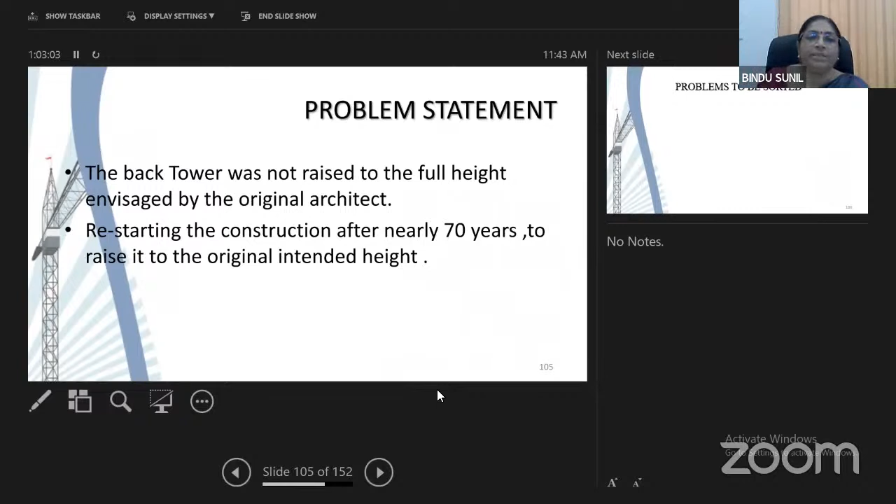So the problem we faced was that the back tower was not raised to the full height envisaged by the original architect. Restarting the construction after nearly 70 years to raise it to the original intended height was our problem. So these are the problems to be sorted.

The tower has to be raised from its completed height of 16.5 meters to the original envisaged height of 70 meters. The foundation has to be constructed within the limited space available of 5.35 by 5.35 meters - this is the size inside the church tower which was raised to 16.5 meters. So only this area is available for us to provide as foundation for the tower to be raised up to a height of 70 meters.

And absence of structural drawings or documents added to the challenge. I'll run through this - the church is of Gothic style, and the height of the front twin towers envisaged was 50 meters, and the height of the back tower envisaged was 70 meters.

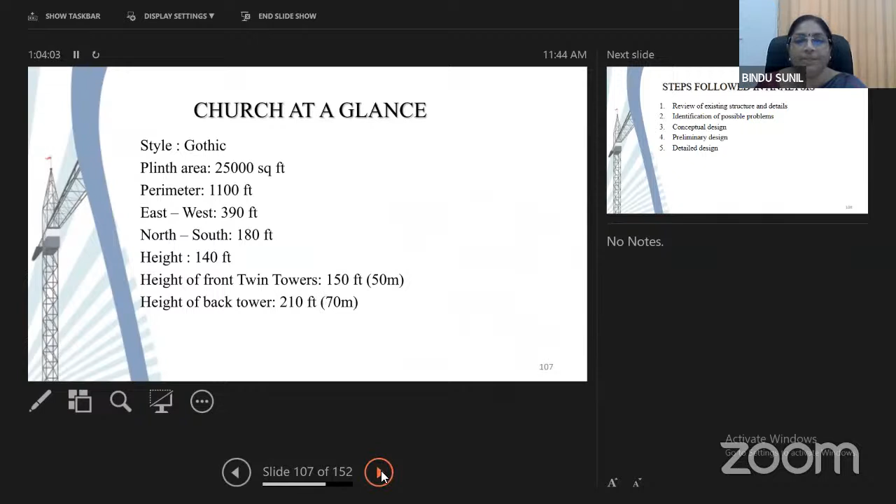So what we did was a detailed study of the problem at hand, and a review of the existing structure and details was done. Then we identified possible problems, and then prepared a conceptual design. Then a preliminary design was done, and then we zeroed in on the system to be followed, and then the detailed design was done.

For the existing structure, the old foundation provided was from a depth of 4.5 meters commencing from hard laterite. This we understand from an architectural drawing where the section was shown. So from that we understand that the foundation was provided at a depth of 4.5 meters from the ground level, starting from hard laterite soil.

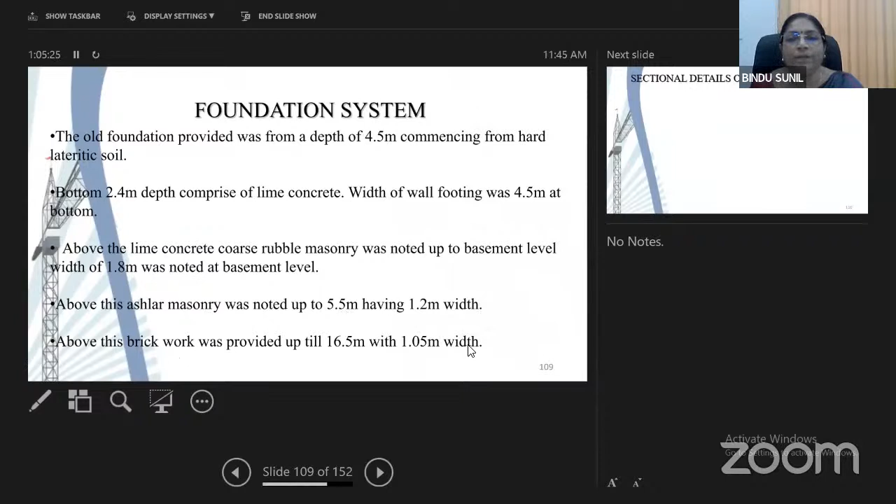The bottom 2.4 meter depth comprised of lime concrete. Width of wall footing was 4.5 meters at the bottom. Above that, rubble masonry was noted up to a width of 1.8 meters. Above this, ashlar masonry was seen up to 5.5 meters, having a width of 1.2 meters. Then 1.05 wide brickwork was shown till the total height of 16.5 meters.

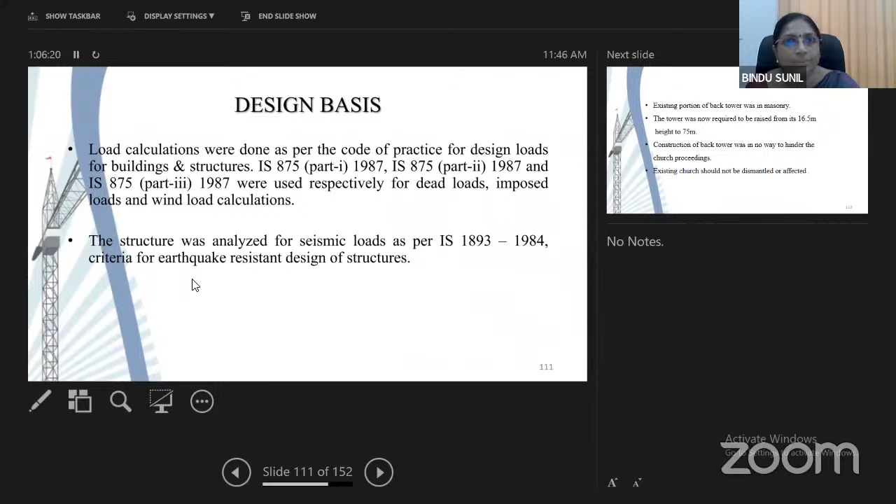Load calculations - what we did was, as for a new building, the detailed loads were calculated, and the structure was analyzed for seismic loads as per IS 1893. All the loads - dead load, live load, wind load, every load expected on the building - were taken, and all the combinations possible were taken, and the building was designed.

For designing the building, we have to have a structural framing work. So for that, this is the problem statement.

The existing portion of the back tower was in masonry. The tower was now to be raised from 16.5 to 75 meters - from the originally envisaged 70 meters, with some other additions suggested by the church people, they finalized on a total height of 75 meters.

Construction of the back tower was in no way to hinder the church proceedings, which were going on, and we couldn't hinder them in any way. So we did not have the freedom to do external work, like columns outside the tower, and then raise it up - we cannot do that. We were allowed to do only work from inside the existing tower, so the existing church could not be dismantled or affected.

So this is a tall structure, and the width of the structure made available to us was very small compared to the height proposed, so it has to be treated as a tall structure. For very tall, slender structures, it is necessary to develop as much lateral strength and stiffness as possible.

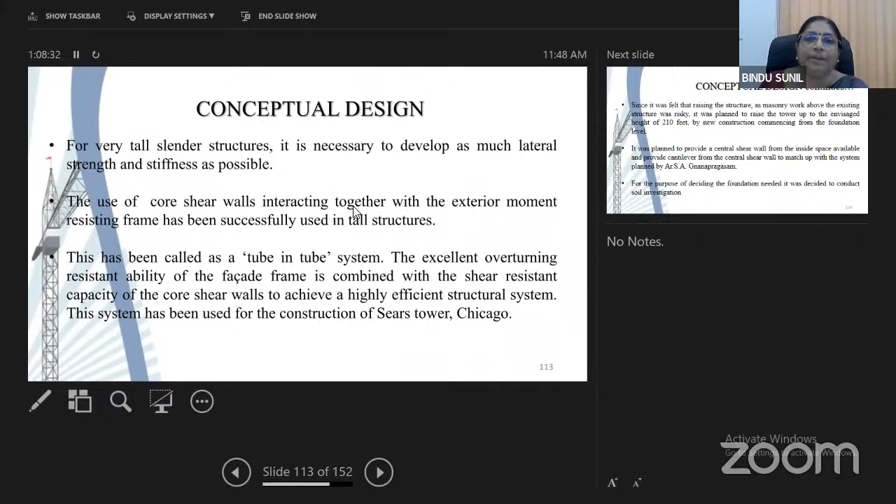The use of core shear walls interacting together with the exterior moment-resisting frame has been successfully used in tall structures. The tube-in-tube system, with the excellent overturning resistant ability of the facade frame, combined with the shear resistant capacity of the core shear walls, achieves a highly efficient structural system. Such a system has been successfully used in the construction of the Sears Tower in Chicago. So we deliberated upon many systems, and this was the system we finally adopted in the design of this Bell Tower.

Since it was felt that raising the structure as masonry work above the existing structure was risky, it was planned to raise the tower up to the envisaged height of 210 feet by new construction commencing from foundation level. It was planned to provide a central shear wall from the inside space available and cantilever it to match up with the system planned by the original architect S.A. Gnanapragasam. For deciding the foundation needed, it was decided to conduct a new soil investigation.

Since it was noted that the construction of pile foundation is not possible from the constrained space, it was decided to make foundation by sinking a well anchored into hard rock in the limited space available between the existing foundation, and to concrete the entire inside portion of the well to make it a massive monopile commencing from the hard rock strata. So we had about 2.5 by 2.5 meter size inside the existing foundation, free for doing this piling.

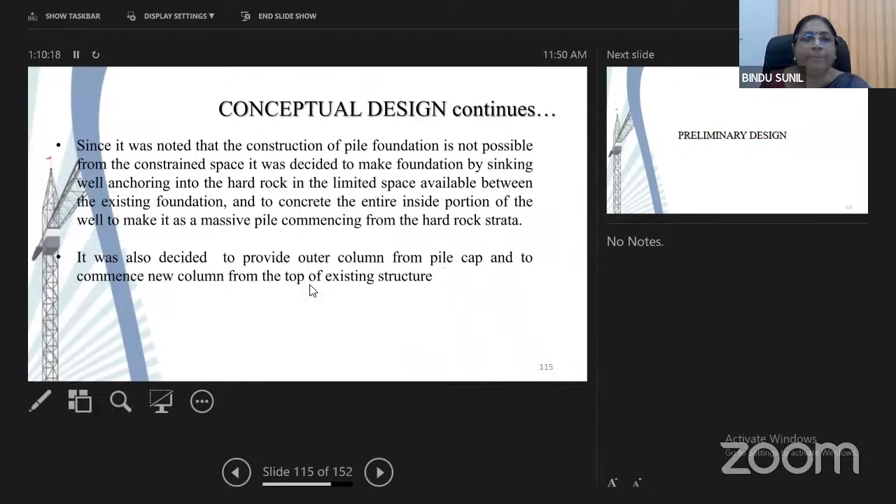So there we sank a well, then excavated soil up to the hard rock, then rebars were anchored into the hard rock using grouting, then concreted till the top, and the inside space was concreted again using additional reinforcement. It was also decided to provide outer columns from the pile cap and to commence new columns from the top of the existing structure.

So for the preliminary design itself, we did 5 different trials: inner core wall only; inner core wall plus outer column with supports above the masonry wall; inner core wall plus outer column without supports; inner core wall plus outer column plus full brick wall bracings and supports; and then the full brick wall bracings reduced to half brick wall bracings. We tried these systems to understand which will give the best result suitable for this purpose. So I'll go through these different options quickly.

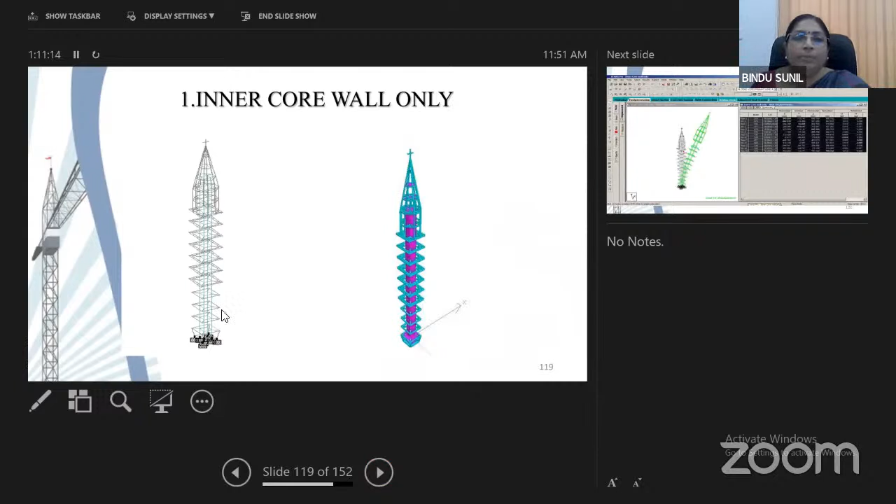So this is the model for the core wall alone. We checked the deflection and the total loads coming on it. Then this is the outer core. In the earlier diagram, there are no outer columns here.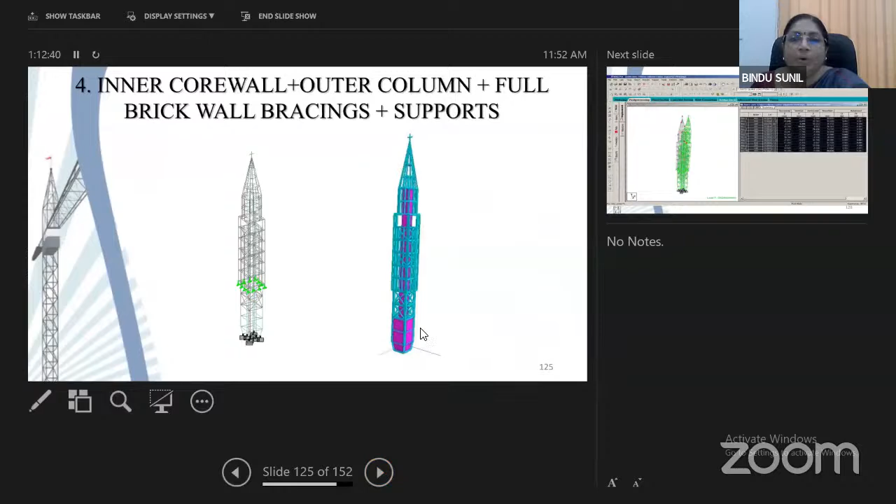Then this is the bracing system provided. In the outer facade, we can provide brick walls, and the bracing effect of those brick walls were taken as cross diagonals in the model. Then those walls were reduced to half brick wall because the loads can be reduced on the foundation. So we thought, if we try with half brick wall, what will be the effect after the analysis? So all these things were done.

All 5 cases' results were plotted on a table, and if we look at it, we can see that the deflection is brought down from 643 millimeters to 80 millimeters when the bracings are provided.

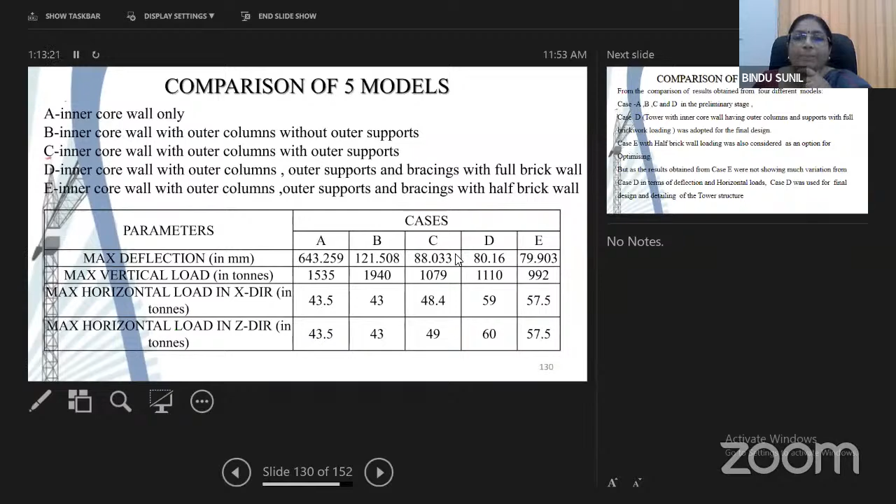So we compared the different systems. We found there was not much variation in the loadings, deflections, or behavior of the structure when the outer walls were half brick wall or full brick wall. So we opted for the full brick wall option. This was the preliminary design, and then finally the final design was done with the option of outer columns, inner core wall, and outer walls provided with full brickwork.

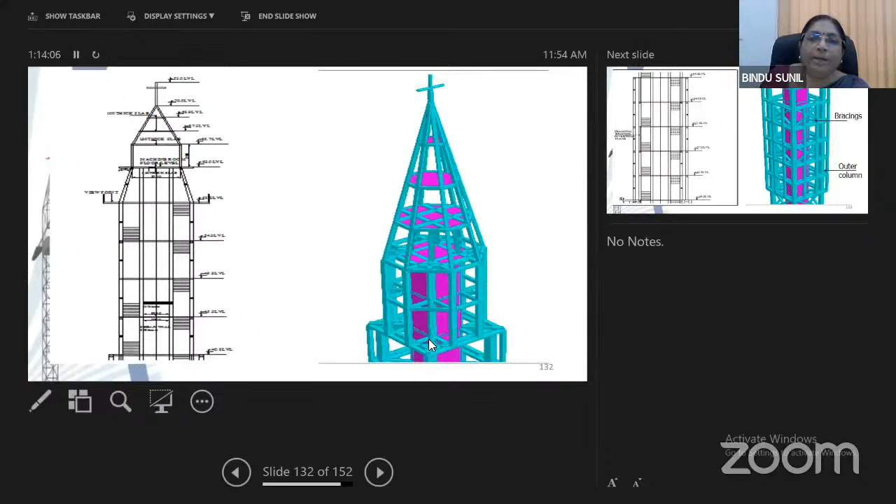This is the drawing from Jnana Prakasham sir, and this is how we modeled it. Each portion is shown here. The in-between portion, the model was like this. These are the outer walls, so here we can provide outer walls. This section was provided by him, and this is how we modeled it.

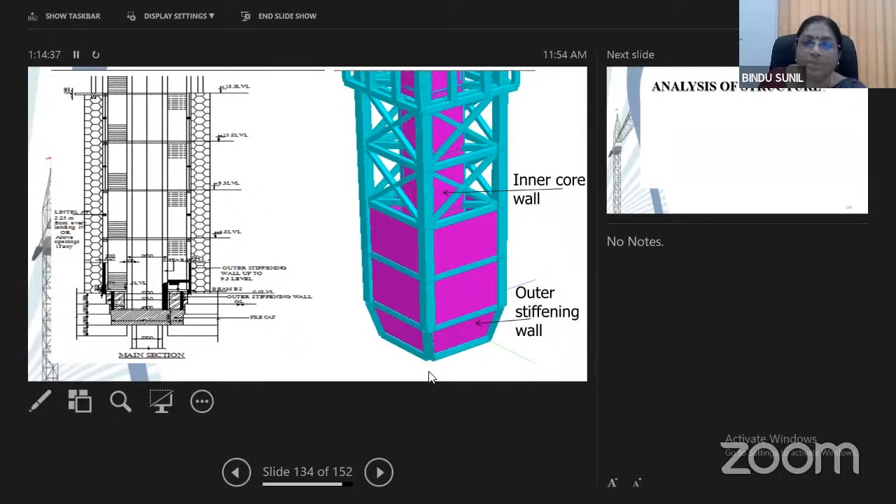This slight slope is seen because we did not have enough space in the inner core inside the building, so slightly inclined columns were taken there, but the shear inner core is taken through and through vertically. The outer columns are slightly inclined and then supported on the masonry wall.

As we have already explained, all the different loads possible on the building were taken. There was also a technical committee with engineers from the church side, ourselves, and public people. We all discussed the loads etc. A peer reviewer was there, they also checked, and the analysis of the building was done using STAAD Pro package.

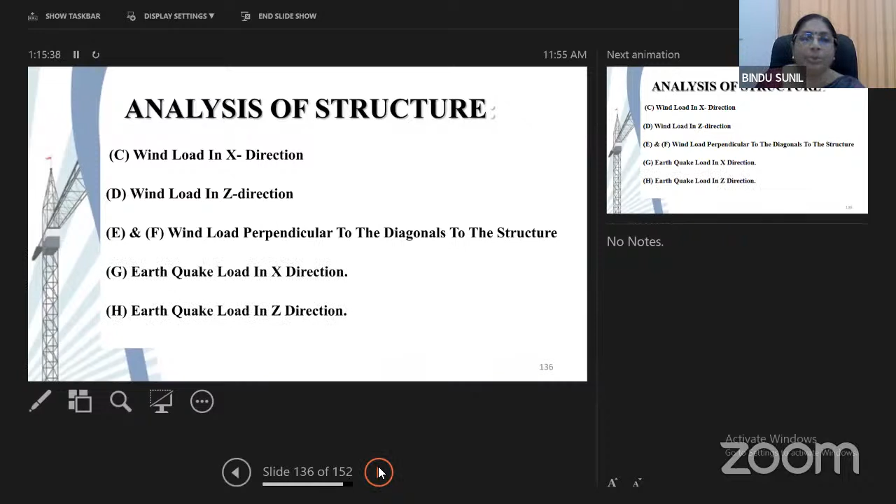The loads, as I have already explained, were dead load, live load, then wind load in X direction, then perpendicular to the diagonals also was taken to understand any torsion development in the building. Then the seismic loads were taken, and combinations of all these were taken.

From the analysis results, across all the load combinations possible, the maximum load coming on the foundation was cross-checked with the capacity of the foundation system provided, and the design of the monopile was accordingly done. Each structural element of the tower was designed for the worst combination of loads, and detailing was accordingly given.

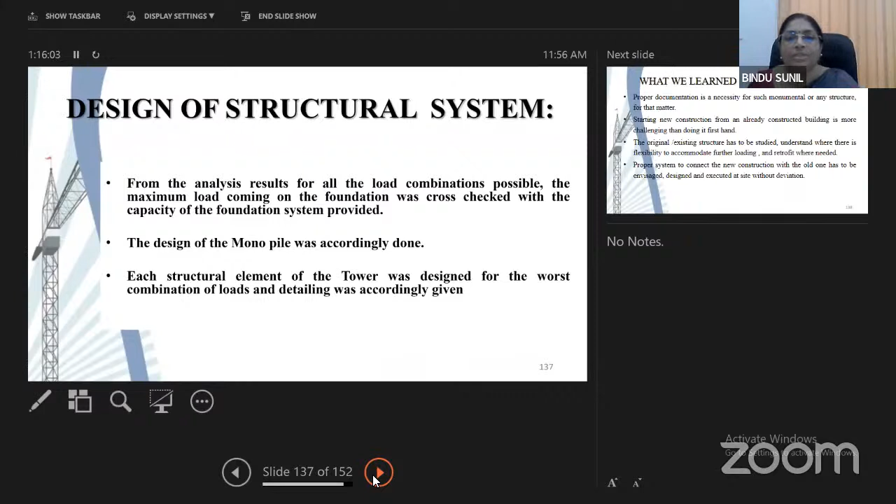So what we learned from this project is that we can design anything, but to restart a project already done is more challenging than doing it the first time. So proper documentation is a necessity for any building. Starting new construction from an already constructed building is more challenging than doing it the first time.

The original or existing structure has to be studied to understand where there is flexibility to accommodate further loading, and retrofit where needed. A proper system to connect the new construction with the old one has to be envisaged, designed, and executed at site without deviation.

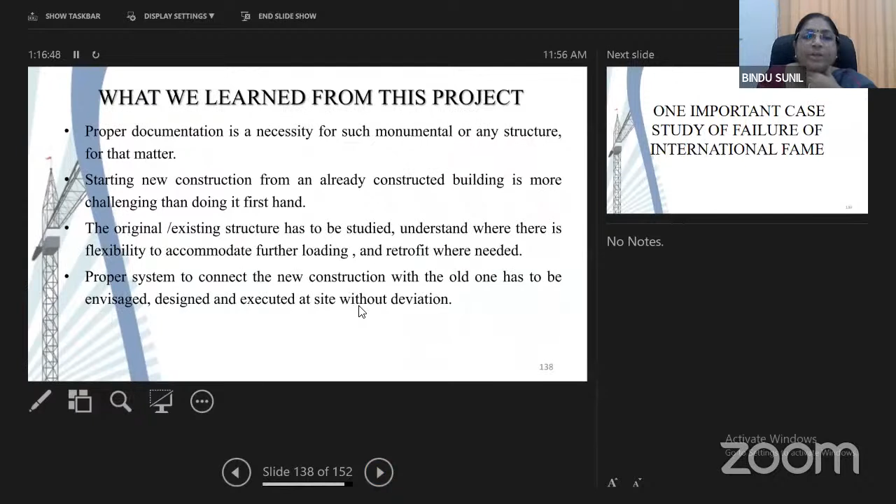Hello, Dr. Neetu. Have I exceeded the time allotted? Hello? Hello, Dr. Neetu. Yes ma'am, have I exceeded the time allotted? No problem, ma'am, no problem at all. Okay, yeah.

So these are the 5 case studies I had prepared to present here. I do hope this was useful to you, for the students here. I thank you for this opportunity given to me to address you on this auspicious day.

Thanks a lot ma'am, we are very thankful to you. You have explained each and every unique failure in detail and what are the remedial measures for the same. So if any of the students or anybody who has logged in has any doubts, you can ask ma'am, either unmute and ask directly or type in the chat box.